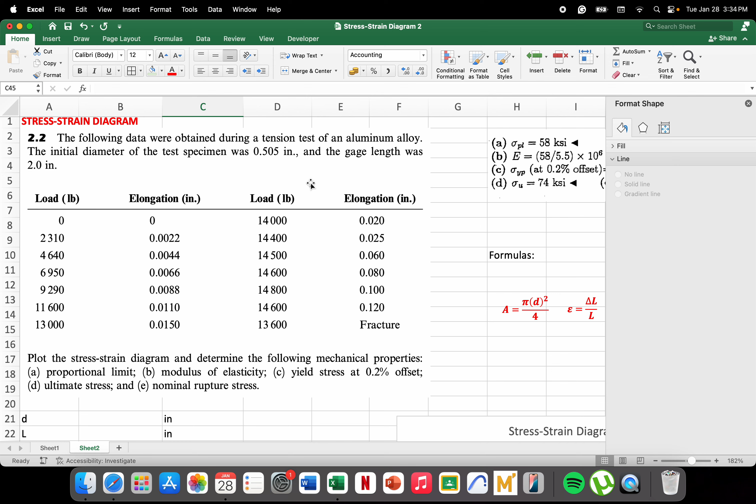Hello, so for this time, we're going to discuss about the stress strain diagram. And we have here a problem.

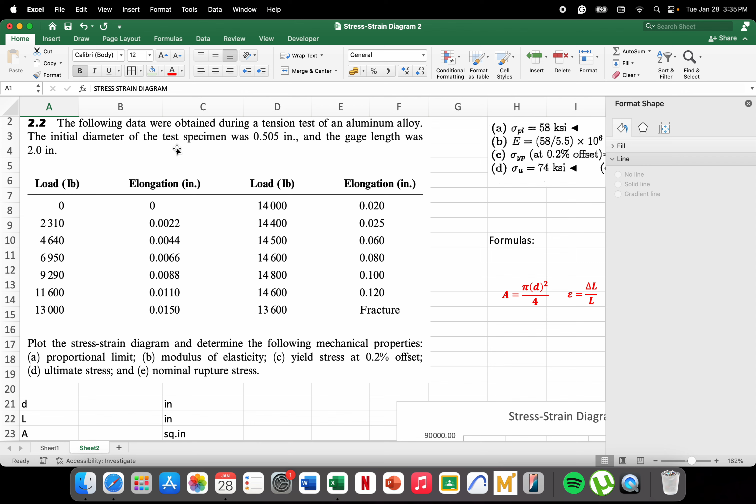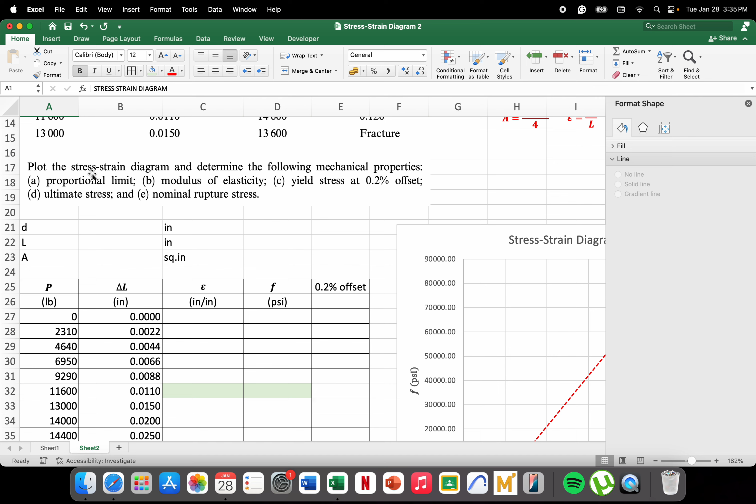The following data were obtained during a tension test of an aluminum alloy, and the initial diameter of the test specimen was 0.505 inches, and the gauge length was 2 inches. So given that we have the data for our load and the elongation, we are being asked here to plot the stress strain diagram and determine the following mechanical properties: the proportional limit, the modulus of elasticity, the yield stress at 0.2% offset, the ultimate stress, and the nominal rupture stress.

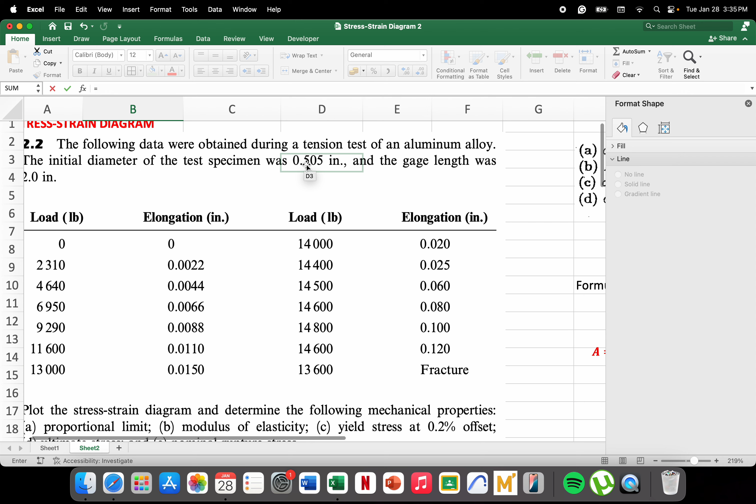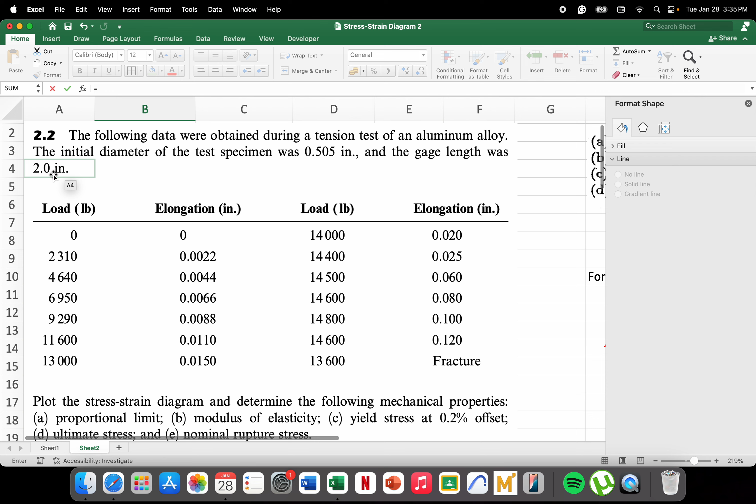So the first thing that we're going to do here is to define our diameter D. Based on our problem, this is equivalent to 0.505. After that, we're going to define our length based on our problem. Our length here is taken to be 2 inches.

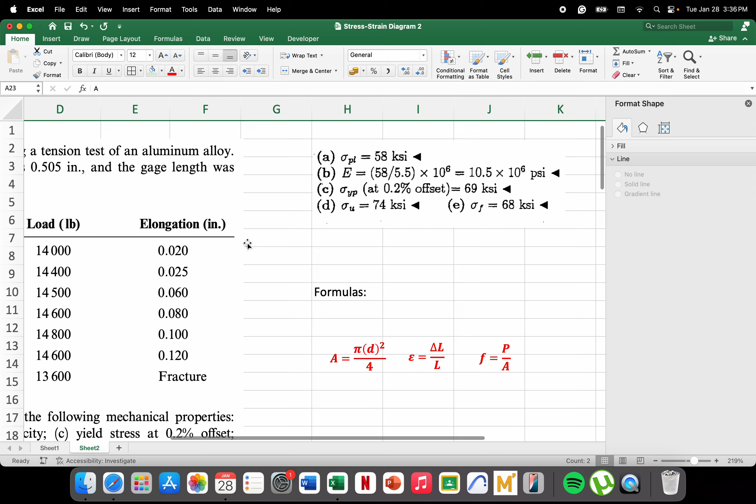After that, we're going to determine our cross-sectional area. Considering that our cross-sectional area here is circular, our area is equivalent to pi d squared all over 4.

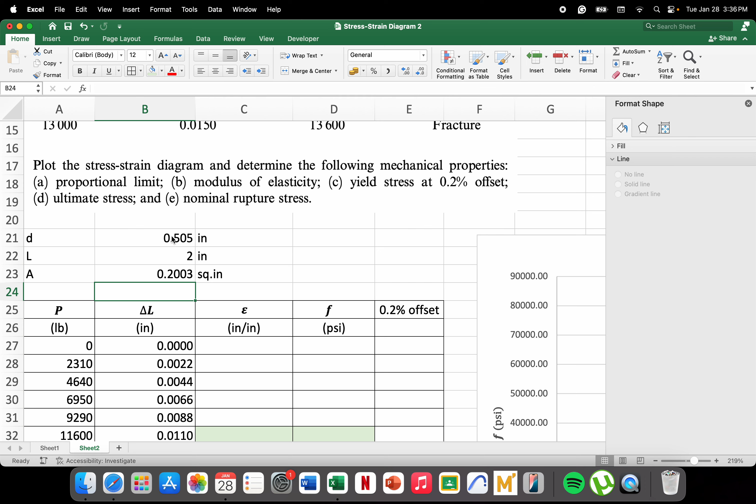After that, we'll make a table to make the calculation easier. The first column is our data for the load, defined by the symbol P in pounds, so you just copy all of the data from the given. Next is the elongation, defined by delta L, in inches. So you just copy that data too.

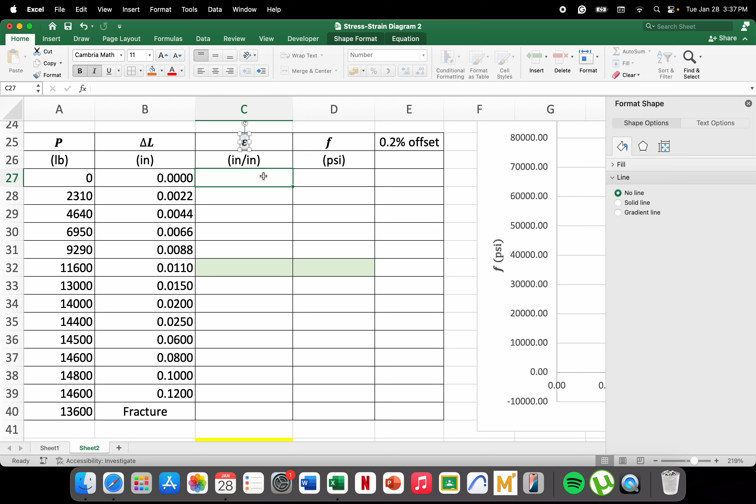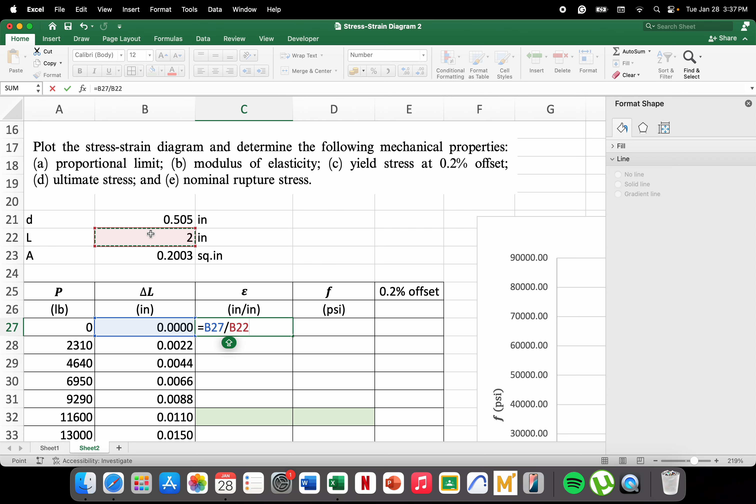After that is the strain. The formula for our strain is delta L all over L. Using Excel, this is now equivalent to delta L divided by the gauge length L. We lock the cell which contains the data for our gauge length, then drag it down. After that, we fix the decimals - at least 4 decimals is already enough.

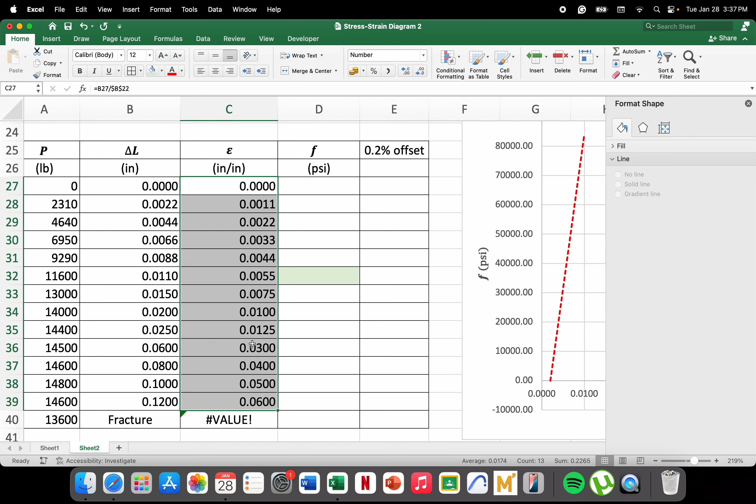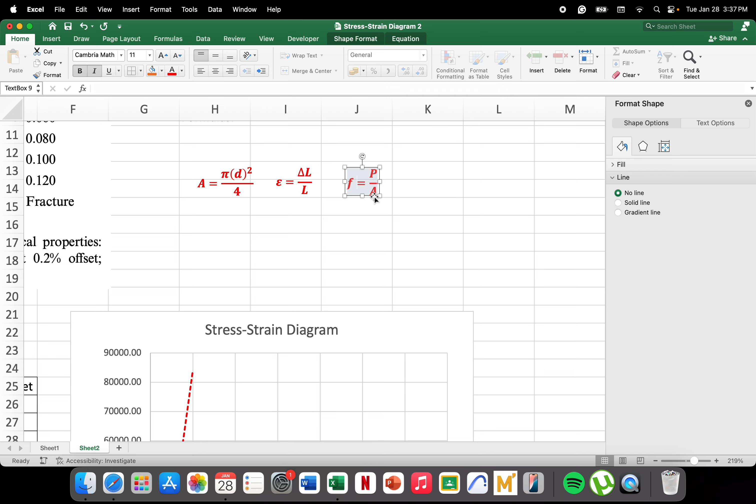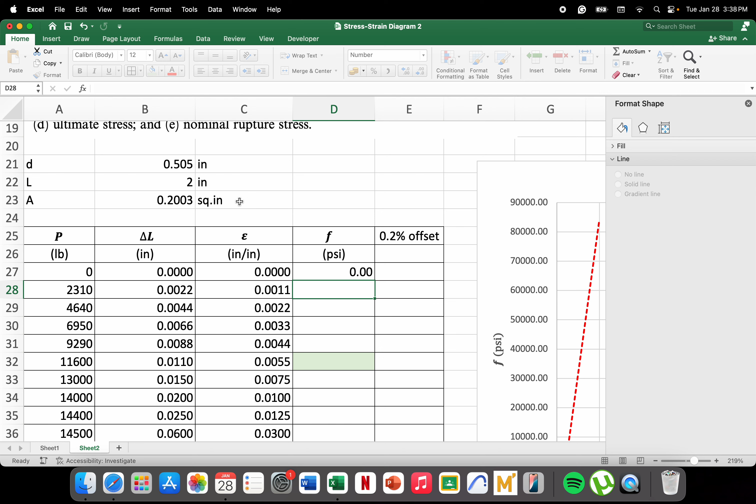So next we solve the stresses. The stress, from mechanics of deformable bodies, is equivalent to force all over area. So this is now equivalent to force divided by our area. We lock the cell which contains the data for our area, then just drag it down. We delete the error here.

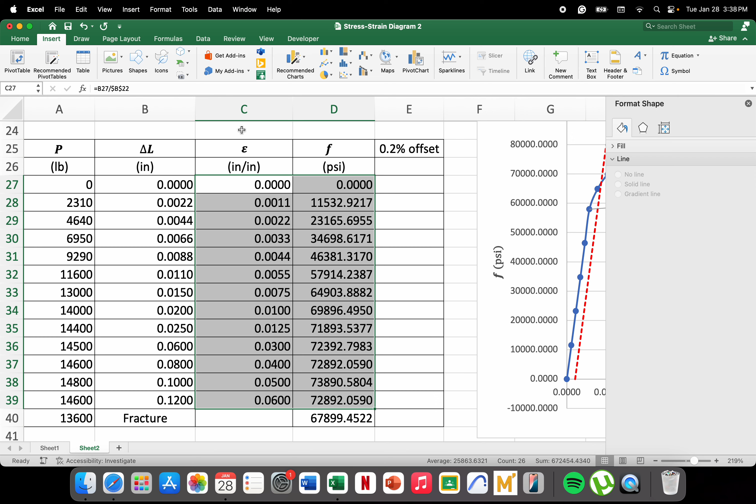Since you now have the data for your strain and your stress, you may now be able to plot the stress strain curve. So the strain is on the horizontal axis, and the stress is on the vertical axis. So this is now the graph of the stress strain curve.

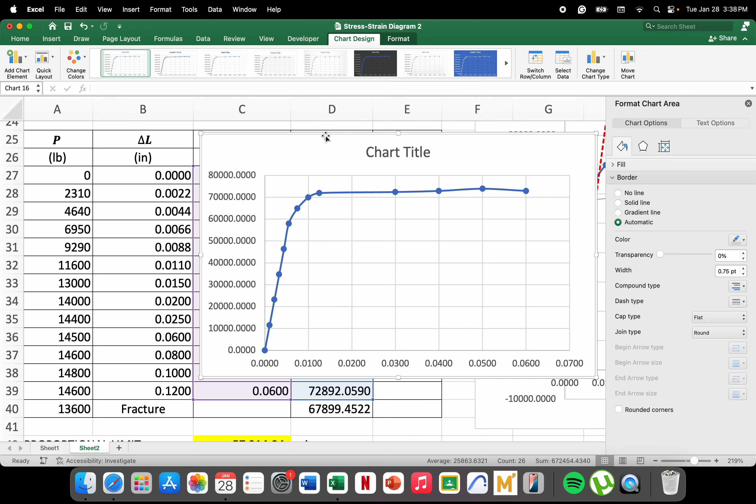Okay, next is to determine the proportional limit. What is the proportional limit, and how do we estimate it from the stress strain curve? What you do is project to find the last point where the stress strain curve is still almost a straight line. Based on our observation, this point is the last point where the curve is still almost straight.

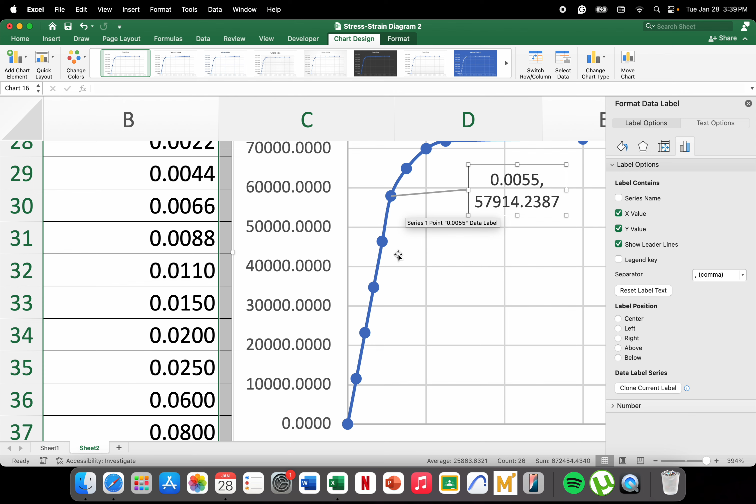If we project the data label, this is our data. The coordinates are 0.0055 for the strain, and the stress is 57,914.2387. So this stress value is now our proportional limit. So the answer for our proportional limit is 57,914.24.

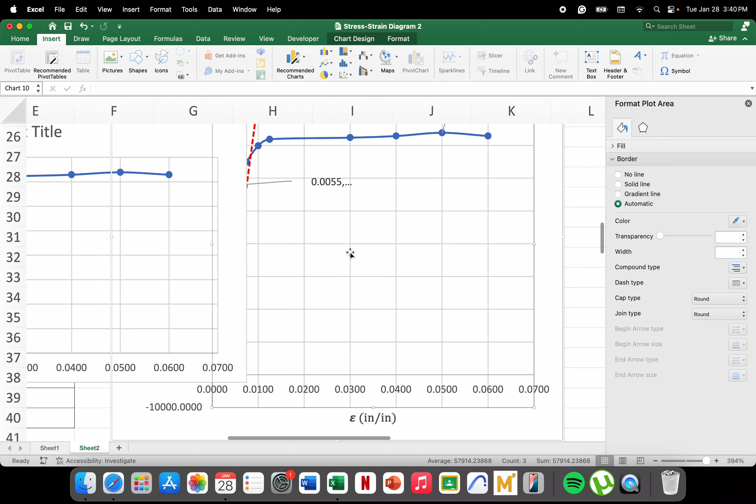After that, the next thing we can solve is the modulus of elasticity. The modulus of elasticity is the slope of the stress strain curve up to the proportional limit. To do that, recall the slope by definition - we have our equation for the slope. From analytic geometry, the slope is equivalent to y sub 2 minus y sub 1 all over x sub 2 minus x sub 1.

In the same way, the modulus of elasticity is equivalent to stress 2 minus stress 1, all over - since x is represented by the strain - strain 2 minus strain 1.

So ano ba yung mga points na kinakailangan natin? Take note yung y2 tsaka x2, then we have y1 tsaka x1.

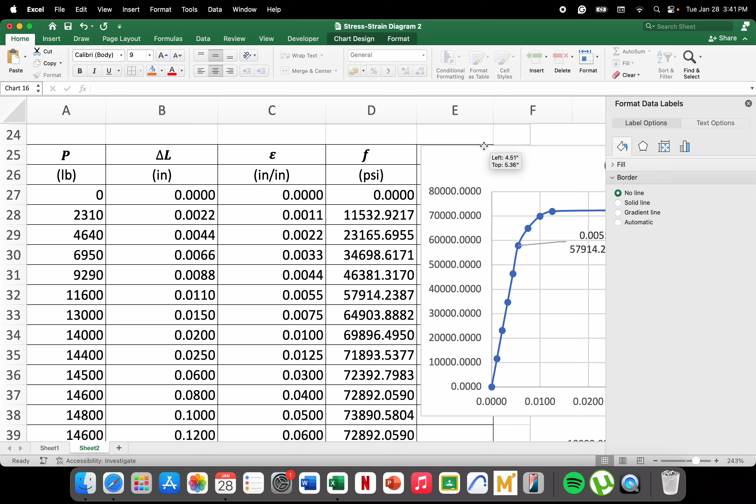So yung y2 natin, ito yung proportional limit ninyo. Ito yung coordinates niya, sa table pwede rin natin itong mahanap. Base sa table, ito yung 57,000. Ito yung x, ito naman yung y, 0.0055. Yan yung x.

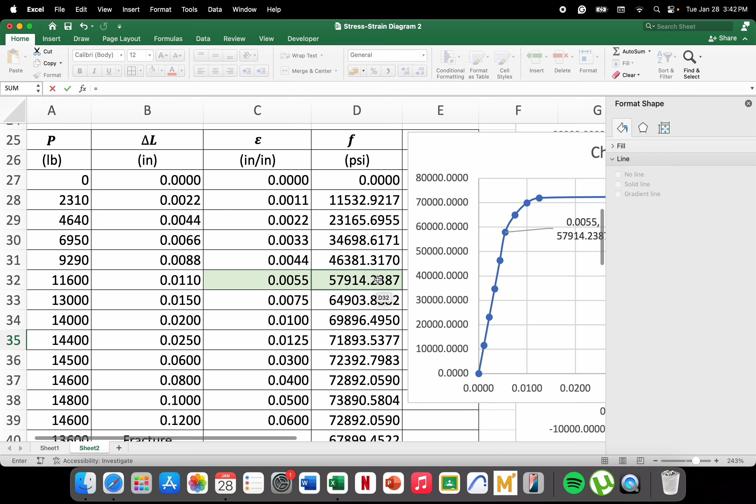Tsaka yung y2, ito naman. Tsaka yung pinaka first na point natin, ito yung pinakauna, yung 0, 0. So from here, we're gonna be able to solve.

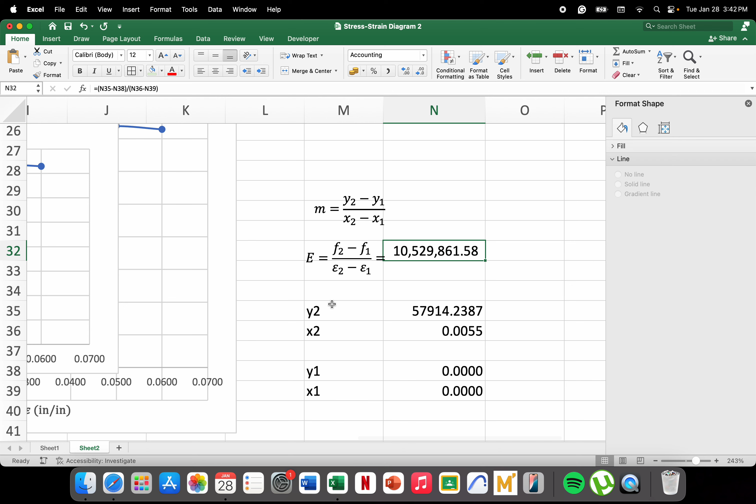So y2 minus y1 all over x2 minus yung x1. So we may be able to get a value here of mga 10,529,861.58. Yung unit nito is naka PSI. So para ma-solve nyo naman in KSI, divide nyo na lang to ng 1,000.

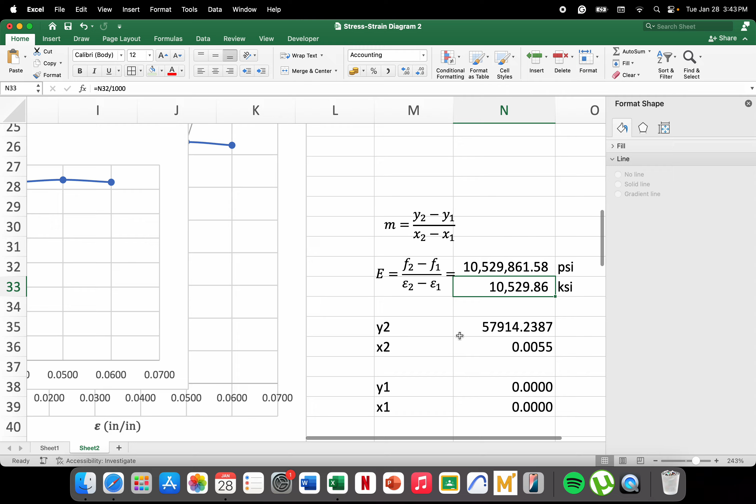Yan, so that's why we have here an answer na 10,529,861.58 PSI, or simply 10,529.86 in KSI, yung elastic modulus.

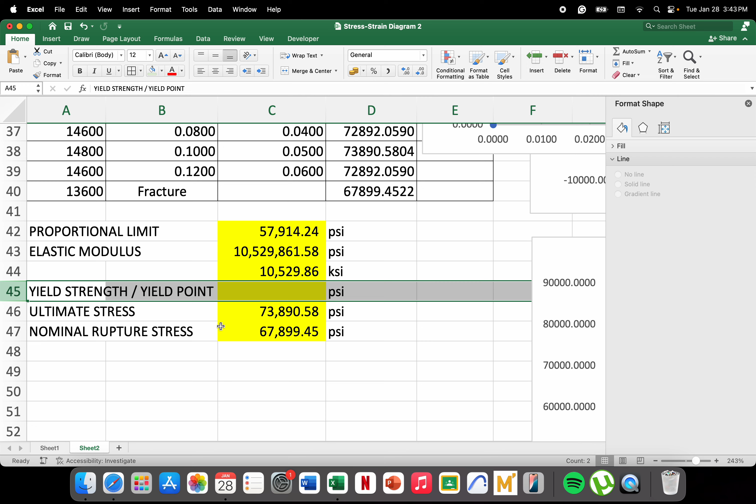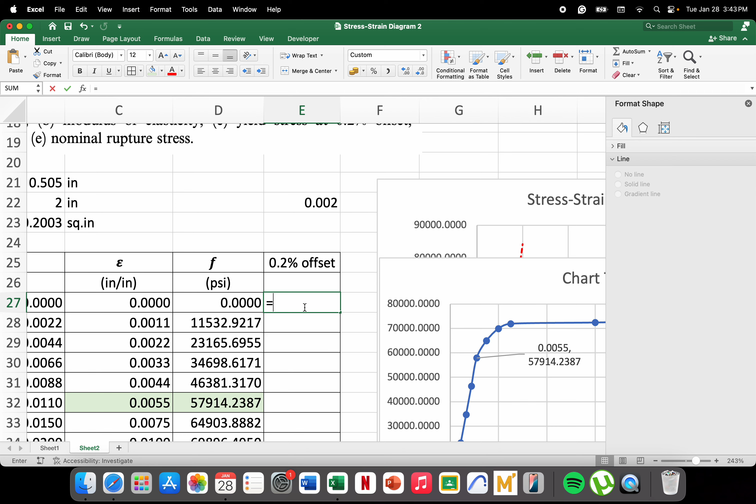After nyan, i-determine naman natin yung yield strength or yield point. So gamit tayo dito ng procedure na 0.2% offset. Yung gagawin lang is itong 0.2%, i-convert nyo muna to sa decimals: 0.2 divided by 100, so 0.002. Ito yung idadagdag nyo sa mga data nyo sa strain.

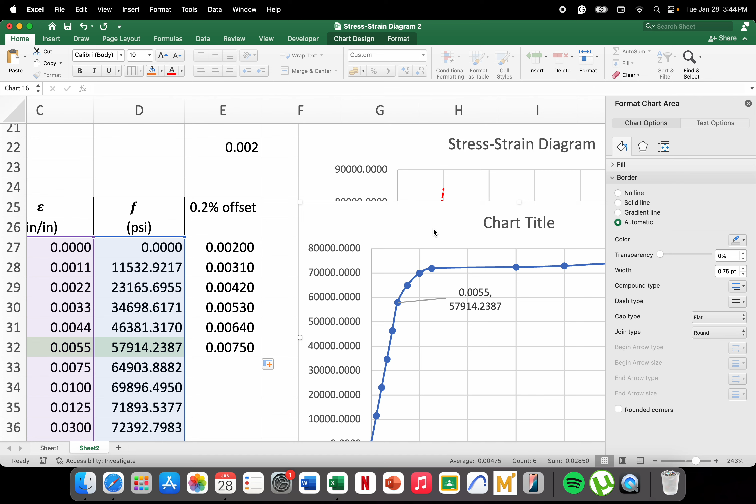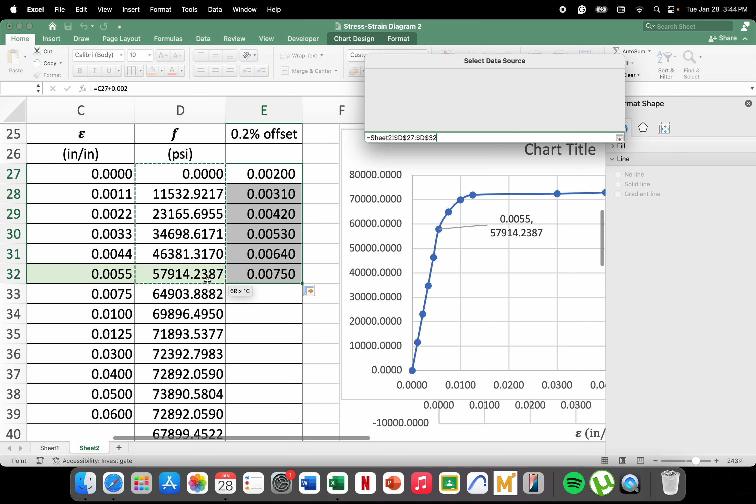Hanggang sa proportional limit. So after that, insert lang yung x natin is yung 0.2% na offset, tsaka yung y natin is yung stress pa rin. Kung mag-insert tayo ng straight line from this point hanggang dito, the point of intersection between the straight line tsaka yung stress strain curve, yun yung location ng ating yield point.

However, masyadong malapit yung mga points dito. So yung usual na ginagawa, itong mga 9 na points lang to, pwede kayong gumawa ng another na chart with which 9 lang yung points. So to do that, count tayo 1 2 3 4 5 6 7 8 9 hanggang dyan. Gagawa tayo ng another na stress strain curve para ma-zoom out natin yung ating stress strain curve.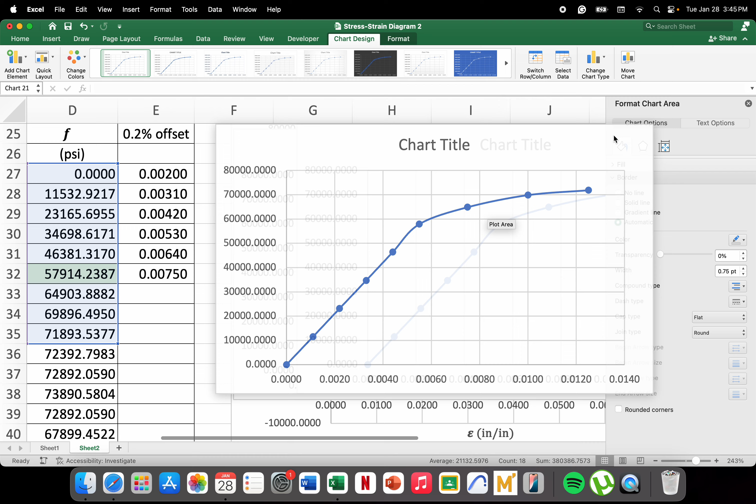Yan siya. Then after that, mag-add lang kayo ng data para sa 0.2% na offset, x tsaka yung y na data natin hanggang sa proportional limit. Pwede kayong mag-insert ng line from this point hanggang dito na point. Yan yung i-red, kapalan lang yung width. So the point of intersection between this straight line from our 0.2% na offset tsaka yung stress strain curve.

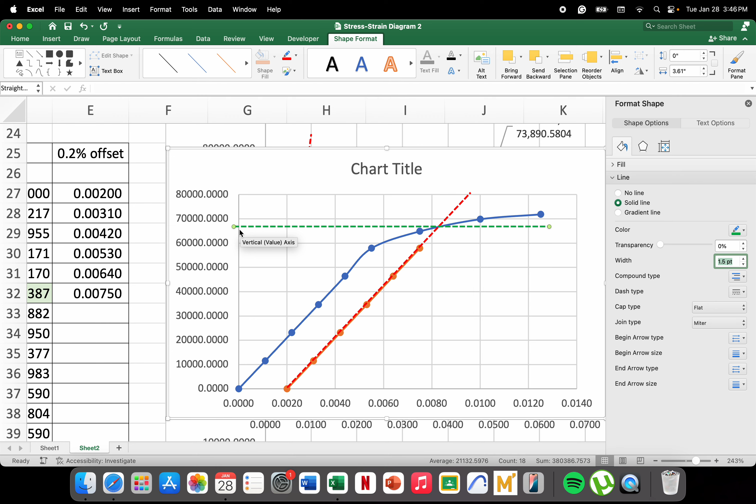Kung mag-project tayo ng horizontal na line, green ko na lang. So the point of intersection between the 0.2% na offset tsaka yung stress strain curve, if we're going to project a horizontal line papunta sa ating y-axis, yan na ngayon yung projected na yield point or yield strength ninyo.

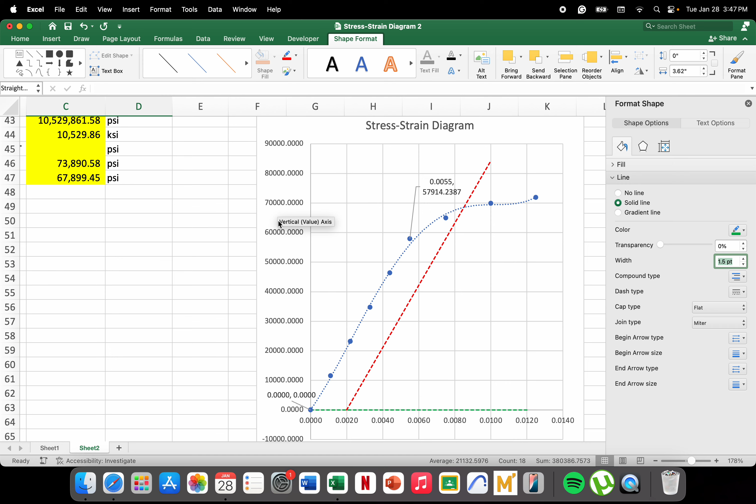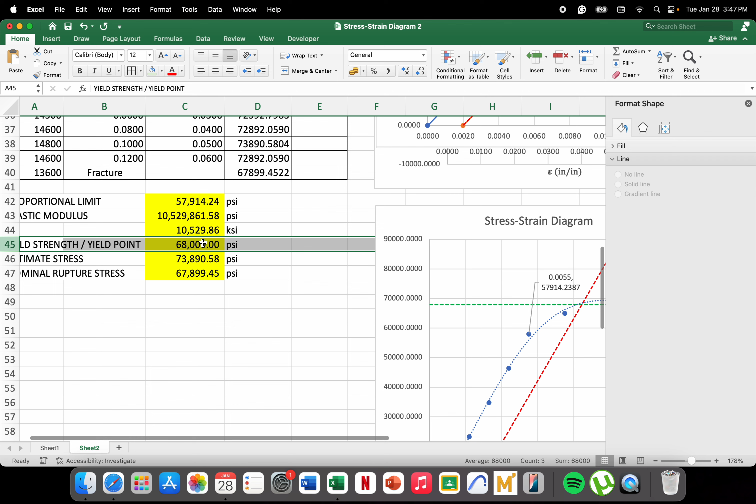So I have created here a more accurate na stress strain curve. Yung approximate na location ng ating yield point or yield strength is in between 60,000 tsaka 70,000 PSI. So if I'm going to project here about mga 68,000, try lang natin, medyo malayo pa siya itong green na broken line. Try natin 69,000. So from here, we may be able to approximate the location of your yield strength or yield point, which is about 69,000 PSI.

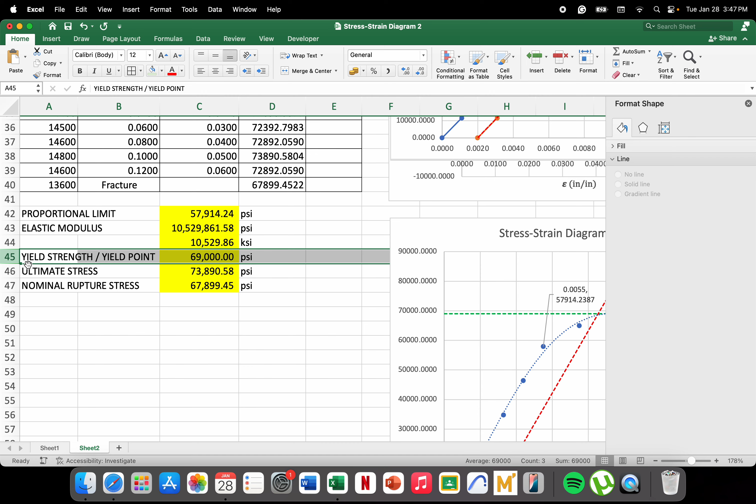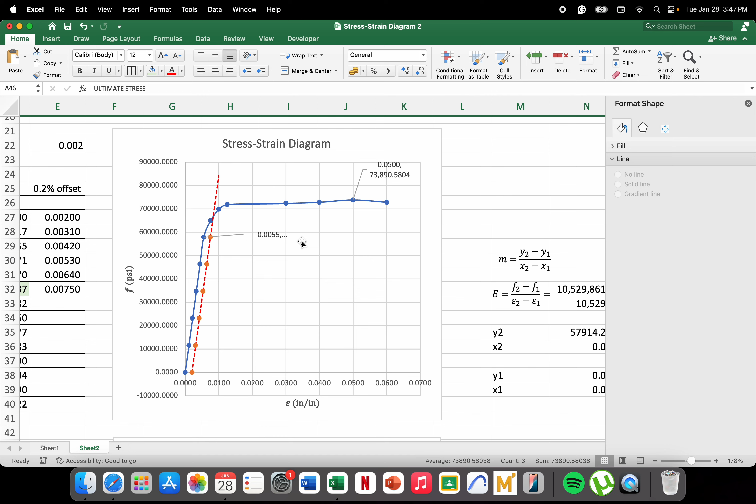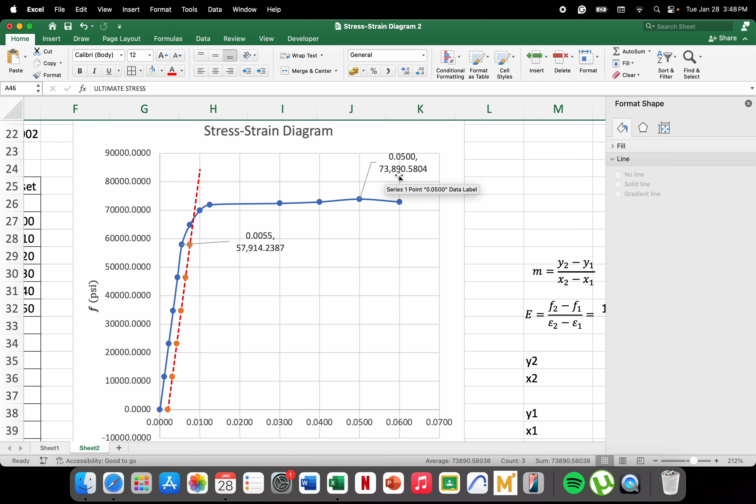Next naman is yung ultimate stress. Yung ultimate stress natin is being defined as the maximum stress sa stress strain diagram ninyo. So based from our stress strain diagram, ito yung pinaka-highest na point natin. And yung coordinate ng point natin dito is 0.05 tsaka 73,890. So itong 73,890 na stress, ito na ngayon yung ating ultimate stress.

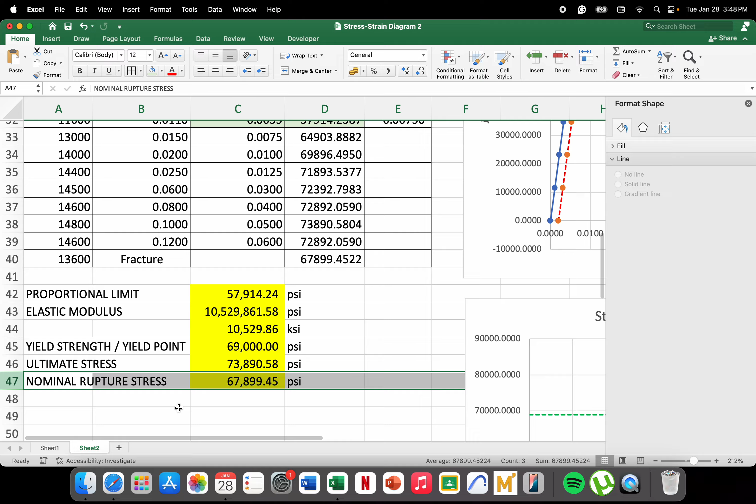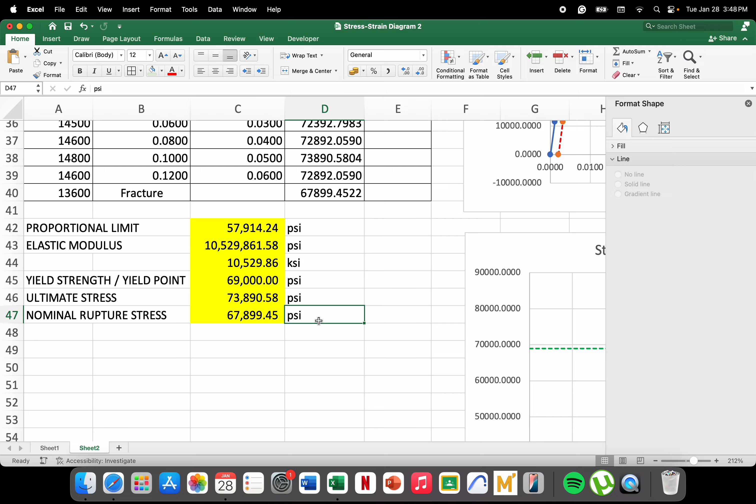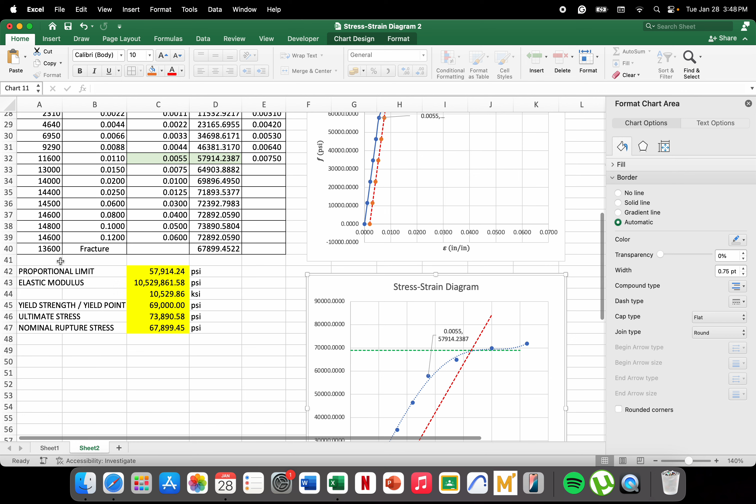Then yung pinaka-last naman is yung nominal rupture stress. So the nominal rupture stress is ito yung pinaka-last na stress na nagkaroon na ng fracture. So based from our tabulation ng ating calculation ng stresses natin, that is equivalent to 67,899.45 PSI. So that's it. So that's how you are going to plot your stress strain diagram and use the stress strain diagram para ma-determine yung mga mechanical properties ng specimen ninyo.